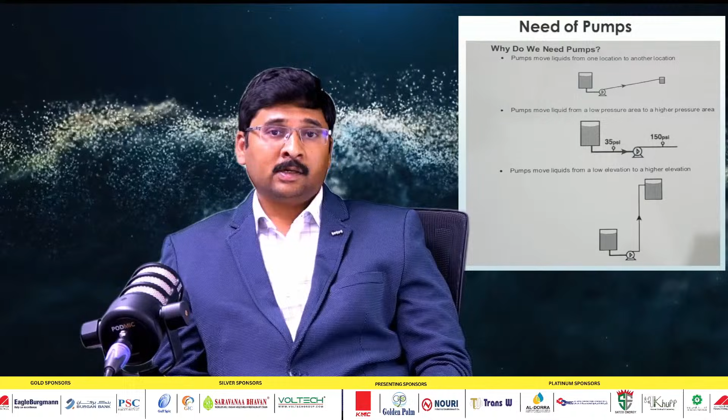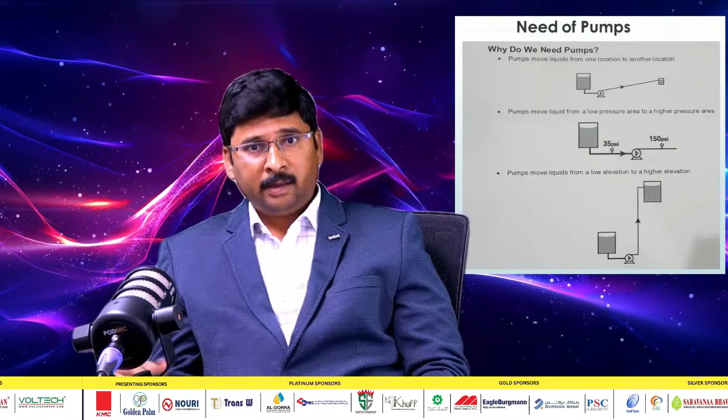The same principles are used in the industries, many plants, like transferring the liquids from one place to another place, or transferring the liquid from a low pressure area to a high pressure area, as well as from lower elevation to higher elevations. Based on its applications and needs, all the parameters will be designed by the consultant. Many parties are involved during the designing of the pump. Based on that, the pump will be used in the particular locations. Also, when we talk about the basic principles, we all know about energy conversion. Basically, energy is neither created nor destroyed.

It will transform from one form to another form. The same way it's applicable to the pump also. Basically, when the pump is coupled with the motor, we give electrical energy to the motor, which converts the electrical energy into mechanical energy, and it rotates the shaft. The rotation is transferred to the pump, so the mechanical energy is converted to hydraulic energy. This is how the pump normally works.

The same way, instead of electrical motors, sometimes diesel engines, steam turbines, or gas turbines are used. So this is how the pump works; this is the basic principle of the pump. We are not going into more depth on how the centrifugal pump works, because it's entirely a different topic. We'll just try to capture the selection of pumps in this seminar.

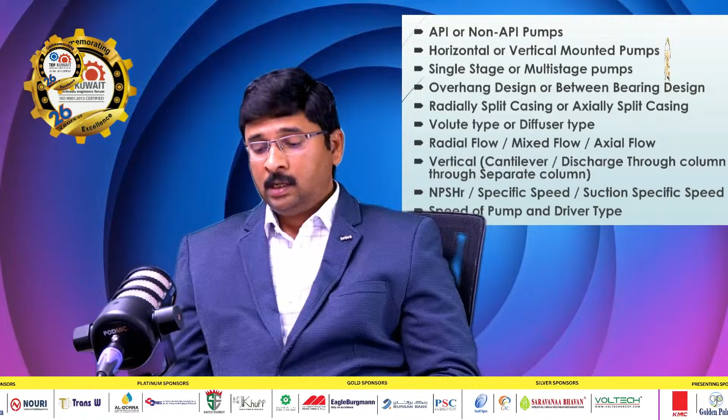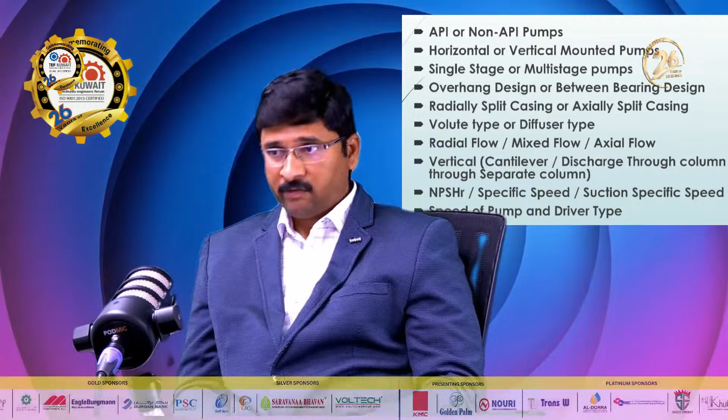Sure, definitely. We will discuss this. Although the pump is a simple mechanical device and the purpose is simple, high-end engineering is involved in the selection of the pump, because in every industry the pump is the heart of the equipment. Almost 70 to 80% of the rotating machines used in industries are pumps. So it requires technical skills for design and selection.

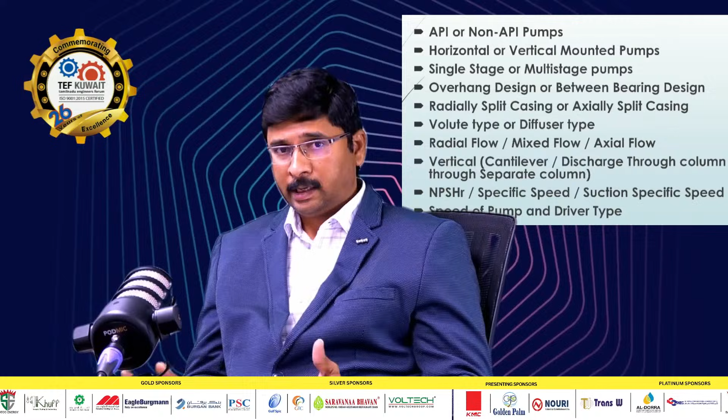Basically, there are some 9 to 10 guidelines involved. The first one is whether it is an API pump or non-API pump. Is it horizontally mounted or vertically mounted? Is it a single stage pump or multi-stage pump? Whether it is an overhung design or between bearing pump design, a radial split casing or a horizontal split casing, a volute type, casing type or diffuser type.

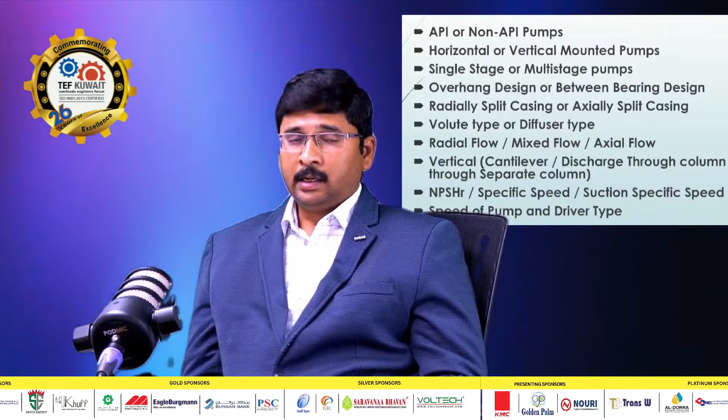There are also some more important parameters like NPSHR, suction specific speed, pump speed, and MOC of the pump. These are the basic parameters to be looked at by the OEM; the parameters are given by the customer, reviewed by the OEMs, and they will offer the pump to the customers. These are the main key parameters. We can categorize them into these basic steps, which give a clear guideline for the OEM to select the pump.

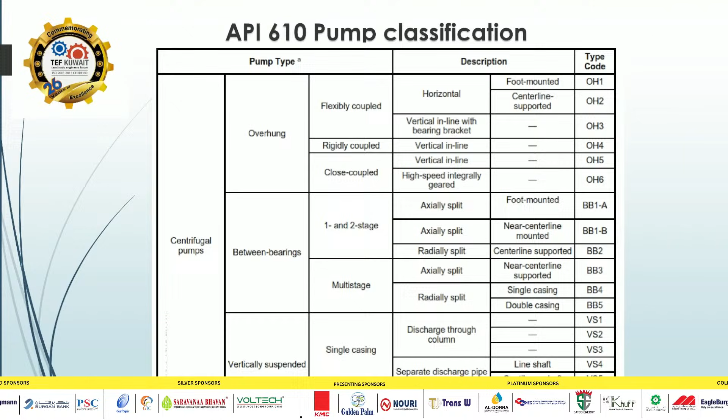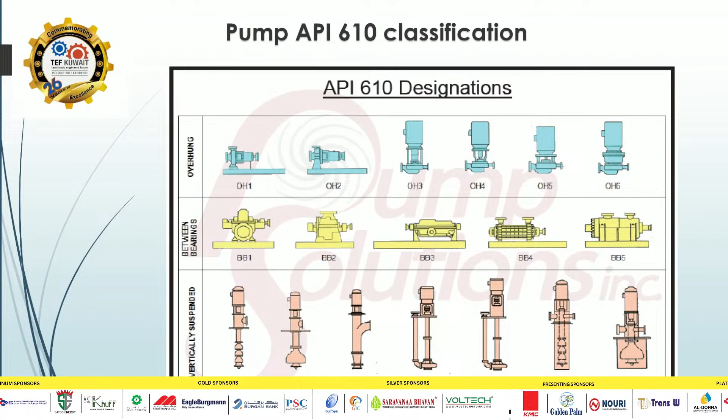There is a pump classification chart in API 610. It is categorized into 3 different parts: the overhung design, the between bearing pump design, and the vertical suspended pumps. You can see it in the picture behind. In the overhung design, we have pump type codes OH1, OH2, OH3, OH4, OH5, OH6. OH1 is an overhung design, a horizontal pump with a foot mounted design.

Although the OH1 pump is codified in API 610, basically it doesn't come under the category of API 610; I will tell you the reason later. Most of the pumps used in the refinery are OH2 pumps. The OH2 pump is the same, an overhung horizontal design, but it is a centerline mounted pump.

In refineries, oil and gas companies, power stations and different locations, almost 50% of the pumps are OH2 or OH1. In non-API industries, other than petroleum, you can see many OH1 pumps. But in the oil and gas industry, the API category, the OH2 pump will be selected. Likewise, we have the OH3 pump, which is like an OH2 pump installed in the vertical position.

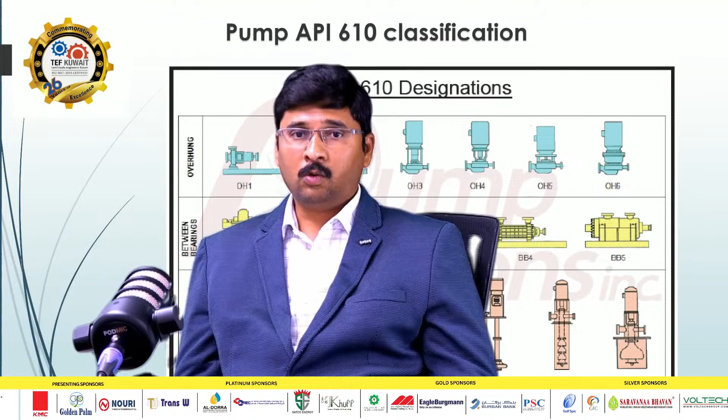This is called OH3 pump design. So basically OH3 is there, and we have OH4, OH5, OH6. It's based on certain parameters, also certain guidelines based on the space restrictions and the application of the pump. So these pumps will be selected. So the overhung design, we have OH1 to OH6. So next we will move to the between bearing pump designs.

So between bearing pumps are generally used in the mid energy range of pumps as well as the high energy pumps. So basically we have a BB1 pump. BB1 pump basically is a between bearing pump. So there is a shaft, and the impeller will be mounted in the center. So two bearings will be used. One will be on the driven side, another one will be on the non-driven side. So this is the basic picture. You can see here the picture. So this is the BB1 pump design.

Also we have two kinds of split as I told you earlier. So one is the radial split, another one is the axially split casing pumps. So the axially split case pumps come under the BB1 category, whereas radial split pumps will be coming under the BB2 category. So basically for the BB1 and BB2 pumps, the construction is the same. However, it's differentiated based on the casing design. The BB1 pump design basically is an axially split casing pump. So the casing opens parallel to the shaft. I mean it's a top open design.

Whereas the BB2 type is almost the same, but it's a radially split case pump. So the casing will open 90 degrees, perpendicular to the shaft. So this is what differentiates the BB1 design and BB2 design. Based on the site, the customer decides whether they need BB1 type or BB2 type pumps. So this is the basic of BB1 as well as BB2 pump selection. But both BB1 and BB2, only one stage or two stages maximum are available. It's not multi-stage. We can provide maximum up to two stages.

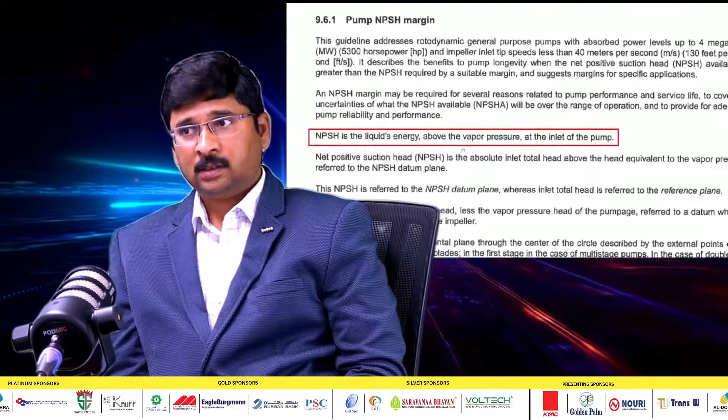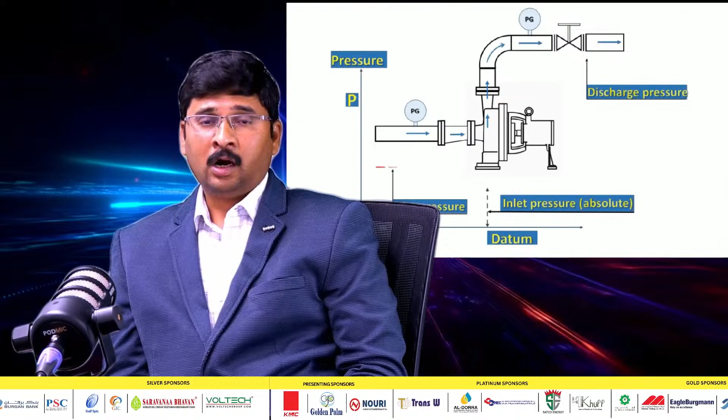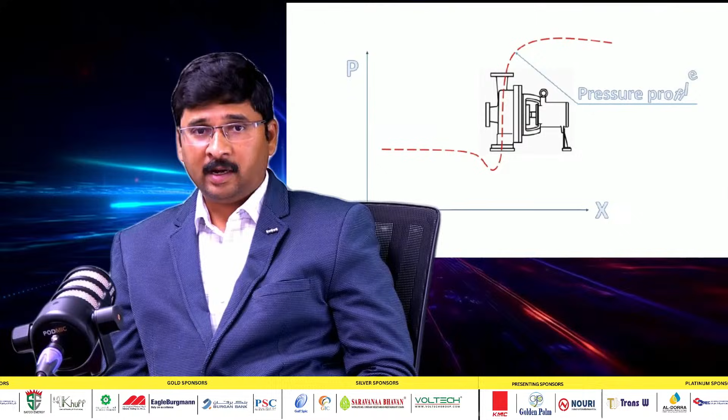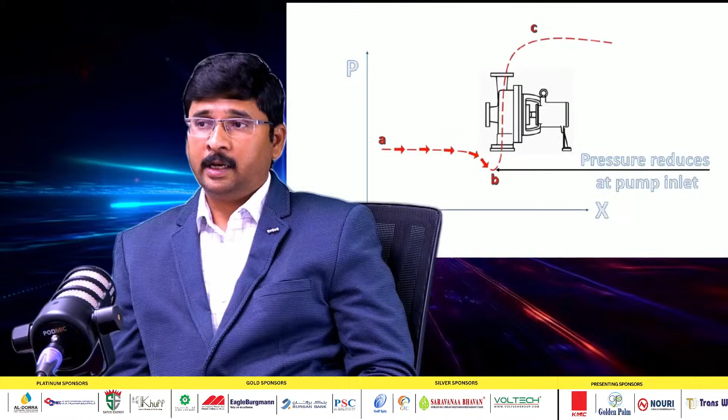NPSH means Net Positive Suction Head. This plays a vital role in selection of centrifugal pumps. NPSH available value is calculated and provided by the customer, based on which the pump OEM will select the pump. There is another parameter called NPSH required, which is a predetermined value for every pump based on its hydraulics. As per specifications and general selection criteria, NPSH required should be 1 meter less than the NPSH available value. If anything goes wrong in the NPSH available value calculation, or NPSH is not met as decided by the OEM, it creates a lot of trouble at the site - leading to cavitation issues, vibration issues, bearing failures and mechanical seal failures, and such problems can never be fully sorted out, they prolong forever. So it is a very important parameter - this NPSH available value should be very precisely calculated by the customer and then provided to the OEM.

Thank you, Megaraj, very well explained. Could you please elaborate on the important parameters called out in API 610 for pump selection?

As per API, the pump design life should be 20 years, and it should provide 3 years of uninterrupted operation from the date of commissioning. This is the basic design life and operational period dictated in API 610. Also, one important parameter dictated in the API is that when dismantling the pump from the site, the pump suction and discharge piping should not be disturbed. Basically, the pump casing should remain mounted on the base frame - only the cartridge assembly should be removed from the site and taken for overhaul. This is determined in order to reduce the downtime when servicing or repairing the pump, so it can be put back into operation quickly. This has been provided in the API guideline to reduce downtime.

There is another important parameter - the BEP flow. Basically, the pump's rated duty point should fall between 80% and 110% of the BEP flow. BEP means Best Efficiency Point. This is the duty parameter - the pump selected should fall within this range. There are also limitations like head rise to shutoff, maximum head increase ratio, diameter ratio, and suction specific speed, which should also be within API values.